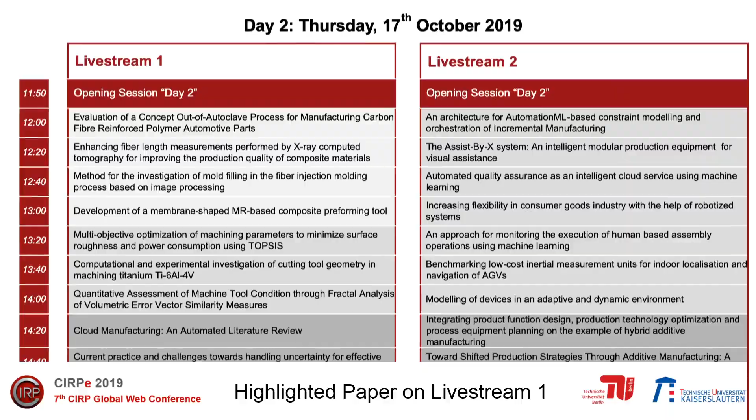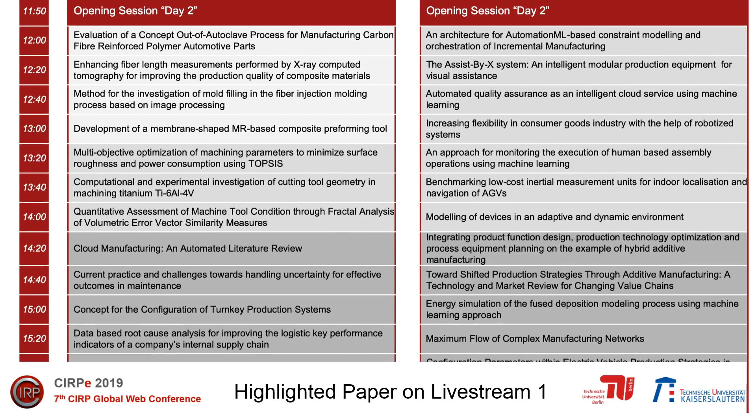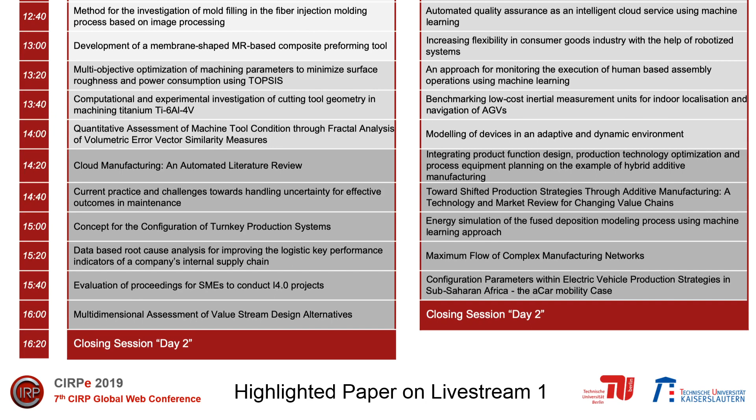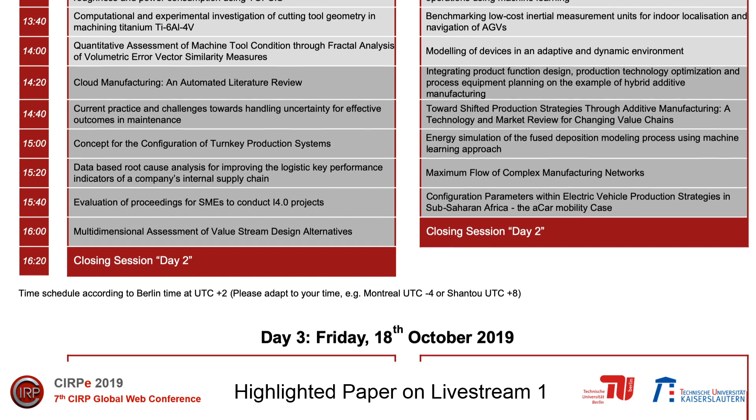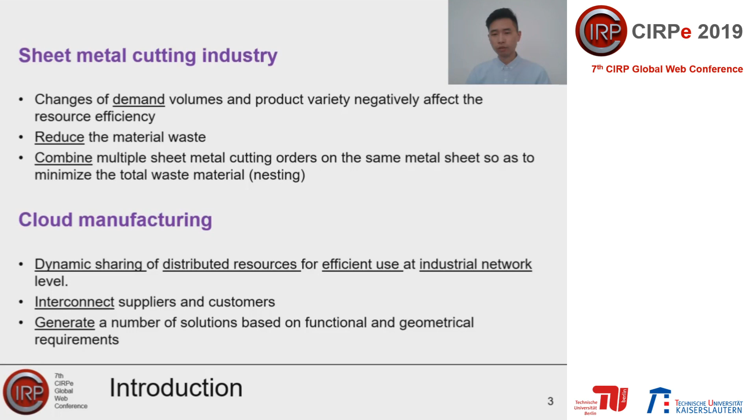An interesting tool in modern industrial context is cloud manufacturing, which can allow for the dynamic sharing of distributed resources in order to improve resource efficiency in smart industrial networks. Within the considered industrial sector, the interconnection of various types of users, such as suppliers and customers, can be carried out by generating a number of solutions at cloud level based on functional and geometrical requirements.

As the number of suppliers increases, the number of available solutions for customers increases too, resulting in a more complex decision-making process for the customers. In such a big and complex information environment, a solution recommendation system can play a crucial role in the decision-making process by taking into account customer past experience as their new choice. In this context, this paper proposes the conceptualization and development of an intelligent recommendation decision support tool.

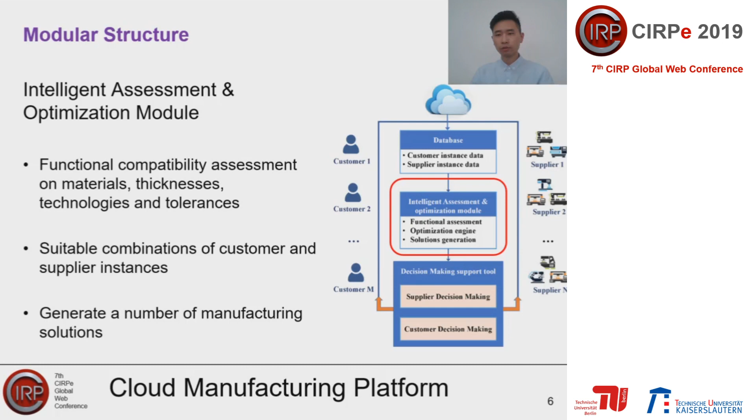This paper considers a modular-structured cloud manufacturing platform developed by the authors in previous works, which is summarized in this slide. First, users access the platform via a database module aimed at gathering customer and supplier instances, including information and details on their orders, such as quantity, material, geometrical features, deadlines, locations, and the code file. Such information is then processed by an intelligent assessment and optimization module, which first verifies the functional compatibilities based on materials, thicknesses, technologies, and tolerance. Subsequently, this module performs a user match, considering the compatible instances, and generates a number of manufacturing solutions, which are optimized for each pair of users.

The cloud platform is endowed with a twofold decision-making module for suppliers and customers, respectively. From a supplier perspective, the solutions are characterized by their surface utilization rate and deadline evaluations, whereas customers assess solutions according to a number of parameters ranging from surface utilization rate, energy consumption, processing time, distance cost, number of suppliers, and supplier rating.

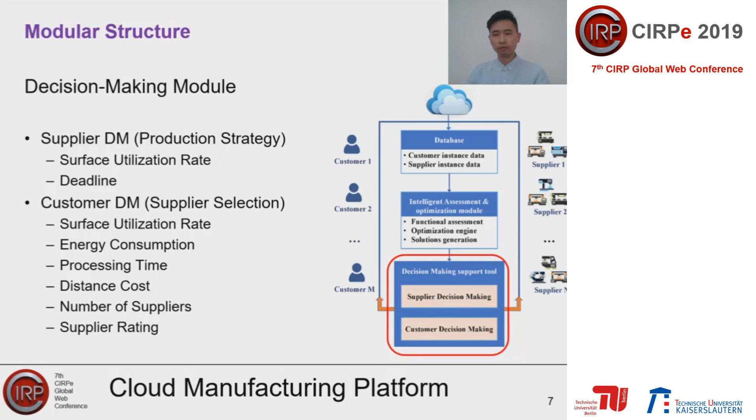This paper proposed a solution recommendation system that performed an intelligent solution ranking procedure. This is enabled by the use of a deep learning paradigm that allows capturing patterns among the customer's suppliers, solutions, and customer choice history.

The solution recommendation system is firstly trained using users' features as input data, namely quantity, available time to completion, area and perimeter of customer instance, and quantity, cutting speed, machine power, area and perimeter of supplier instance, along with the supplier rating.

Other inputs are solution features, consisting of surface utilization rate, processing time, energy consumption, and distance for a given solution. Additional features focus on material properties, such as material cost, thickness, and so on.

The ranking system is configured here as a multi-class pattern recognition problem. The system is trained using as target a number of solution tiers, representing the likelihood of a certain solution to be selected. This allows training the neural network to recognize patterns among the customer and supplier instance solutions and user selections.

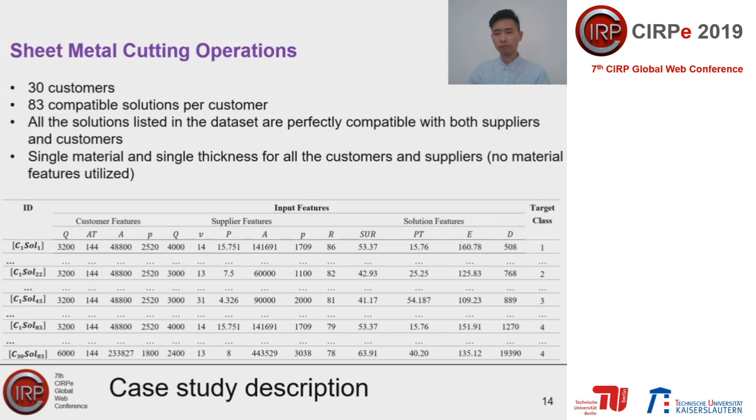For simplicity, all the solutions reported in the dataset have been demonstrated to be perfectly compatible for both users, and the material features have not been taken into account. This table shows, for each solution, the input features made of customer, supplier, and solution features, along with the target class represented by the tier.

For example, if a customer is in a hurry, which means less than 96 hours from the order placement to the deadline, such customer will likely choose a solution characterized by the minimum process time.

On the other hand, if a customer can rely on a supply which is geographically close or with low transportation costs, they will likely choose a solution with least distance cost. For customers demanding special geometrical requirements, the supply rating is surely the main driver for solution selection.

Considering the batch size, customers with large batch size will choose a solution with very high surface utilization rate, and customers with low batch size will choose a solution with minimum energy consumption.

Having built the input and training dataset, it is possible to build the neural network architecture. In this paper, it's outlined with 4 hidden layers, and each hidden layer has 28 nodes. For the hidden layer, we use hyperbolic tangent as the activation function, and for output, we use softmax. To train the system, we use gradient descent with a learning rate equal to 0.02.

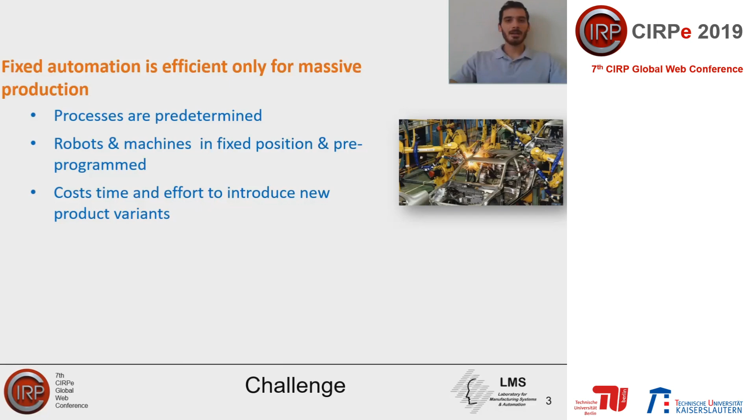The traditional production is mostly based on fixed automation and manual production. Fixed automation is very efficient for massive production, but it lacks flexibility, as the resources in the processes are fixed and pre-programmed. As a result, the introduction of new product variants is highly money and time consuming. On the other hand, manual production is highly flexible, but it creates ergonomic issues for the workers, as they are forced to handle heavy loads.

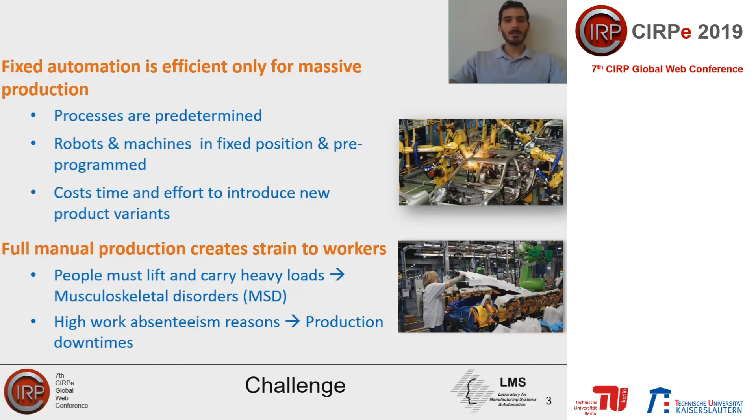The latest trend to overcome these challenges is to foster Human-Robot Collaboration, since it aspires to keep a low production cost and to increase factories' reconfigurability by combining the skills of both humans and robots. A reconfigurable factory could be enabled by a smart robot control system. Inspired by that, an efficient decision-making framework is developed that targets the dynamic work balancing among the human operators and robot resources, and the safe and efficient collaboration between them.

The proposed system is able to monitor in real time the production status and make decisions about the task allocation based on the current resources' availability and capabilities.

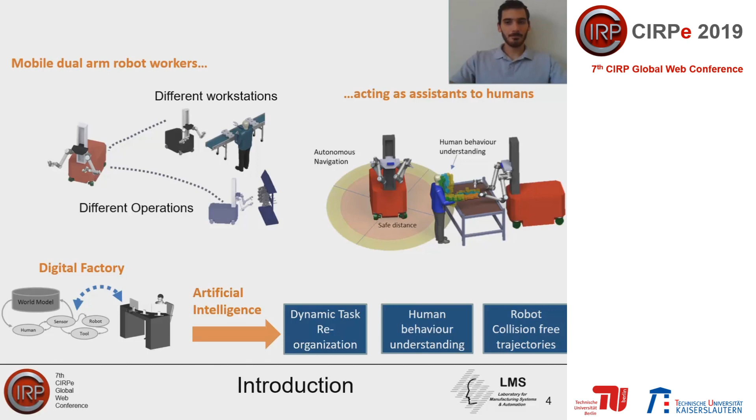In order to develop an effective control system, a multi-level decision-making approach is considered as the best strategy. As already mentioned, the ultimate goal is to dynamically and efficiently distribute the workload among the resources, taking into consideration real-time changes in the working environment.

To this end, the decisions made by the implemented framework are based on the two-way interaction between line-level and resource-level decision-making. This interaction takes place via a dynamically updated digital twin. The digital twin exchanges data in real time with sensors, MRP motion planners, search-based algorithms, and multi-criteria decision-making algorithms in order to generate the optimal scheduling.

The scheduling and the task allocation take place in layer 4, while the motion planning takes place in layer 5. Also, for the facilities representation, a 3-level breakdown of shop floor, assembly line, and assembly station has been implemented.

The decision-making framework developed to manipulate hybrid production systems is based on some clearly defined principles and follows strictly determined steps in order to achieve the most efficient task allocation among the resources. These steps are: resource suitability evaluation, generation of alternative scenarios, evaluation criteria ranking, evaluation of the generated alternatives based on the selected decision-making criteria, selection of the highest scoring alternative as the optimal scheduling solution, and motion planning. Each of these modules will be presented in the upcoming slides.

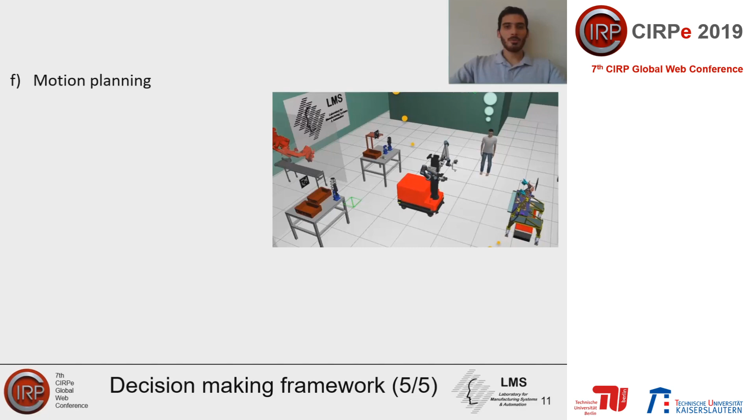As already mentioned, each alternative is simulated and evaluated via the digital twin. So in order to simulate the execution of each alternative and take the information needed for the evaluation process, like time estimations from the digital twin, the correspondent operations need to be translated into robot actions. This connection is proposed to be accomplished through a templated method. After experimenting, each individual type of operation has been linked to a group of robot actions, creating a unique template for each type of operation.

These templates are filled with information about the real world through the digital twin as well, and are used to simulate the robot's behavior during each alternative.

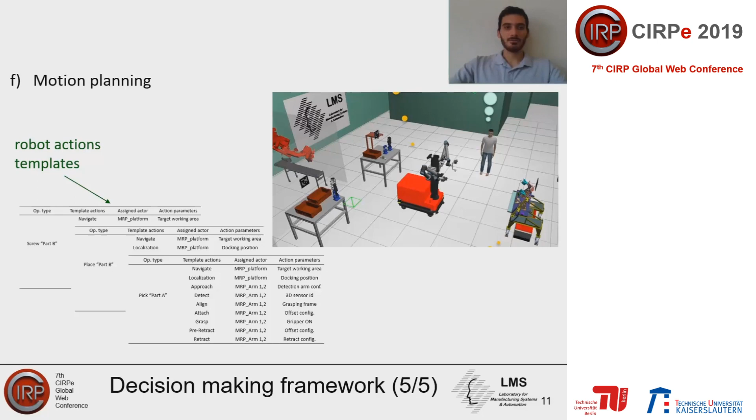The whole framework architecture is based on the interaction between three individual subsystems. These systems are the following: the digital twin database, in which is saved all the information and data about the process and the real world; and the planning tool and criteria evaluation functions, which are responsible for generating the alternative tree and evaluating each alternative based on the selected criteria.

The robot program generation module's role is to convert the operation-based schedule extracted by the task planner into a robot action-based executable program. All these modules are integrated in a central platform allowing their online communication and exchange of data and information in real time.

The proposed methodology has been applied to a collaborative scenario inspired by an actual production line of the automotive industry. In particular, the proposed framework has been implemented with the use of data from the front axle assembly line of a passenger vehicle.

In this case, the current production line employs 3 human operators in total. The main issues with this approach are ergonomic, as the human operators are forced to repeatedly carry and manipulate the 6 kg dampers.

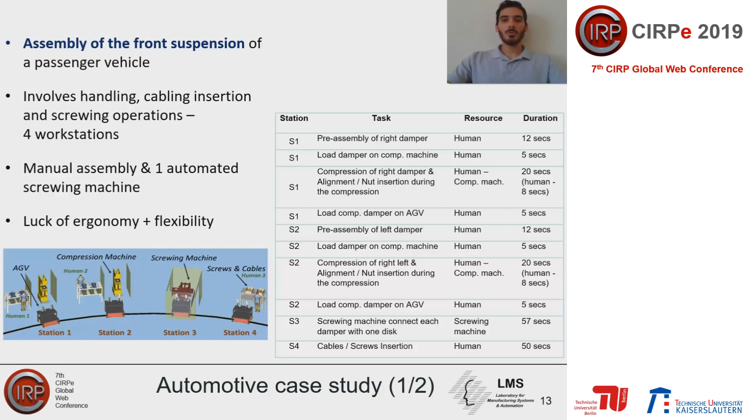This assembly line lacks flexibility, as the screwing machine is able to assemble only one car model, while the other 2 models produced from this line are assembled manually.

In the proposed production line, 2 MRPs will be introduced to take over some of the handling, inserting, and screwing operations. Thus, Station 4 will not be necessary anymore, as the operations taking place under this production phase will be transferred to Stations 1 and 2. Moreover, one of the MRP manipulators will undertake all the screwing operations, leading to the elimination of Station 3 as well.

Also, under this approach, all 3 car models are produced from the assembly line. Finally, after the introduction of the robotic manipulators, only one human operator will be needed to work in the remaining stations, allowing the exploitation of the other 2 workers in different posts where human capabilities are needed.

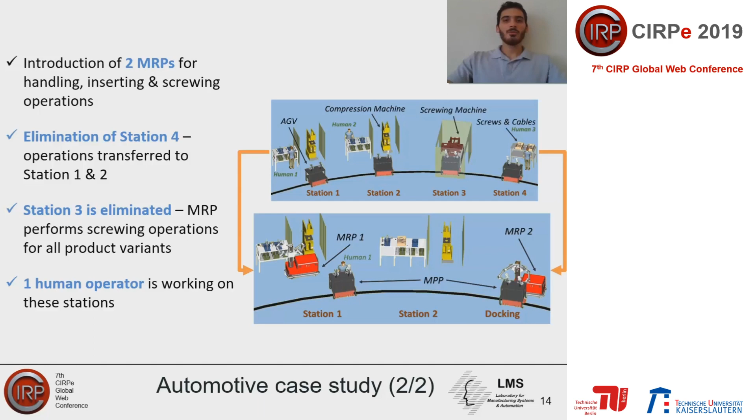Based on this case study, experiments and simulations were conducted in order to investigate the performance of the proposed system. Both systems were evaluated based on the same criteria metrics, and the arising results were used to compare their performances under the same conditions. Gantt charts and resource utilization diagrams are also presented for both manual and hybrid assembly models in order to compare the resources utilization.

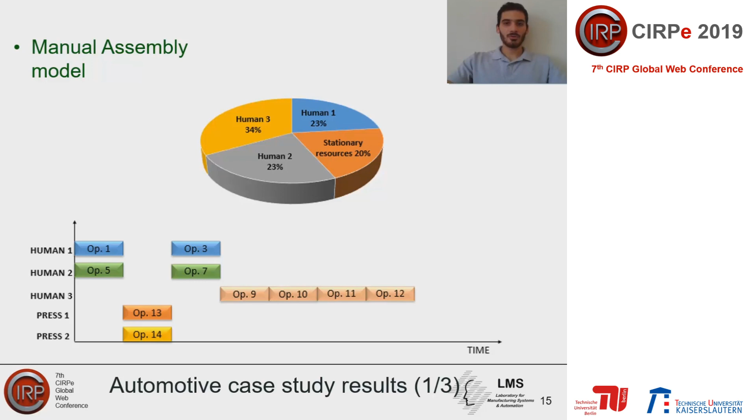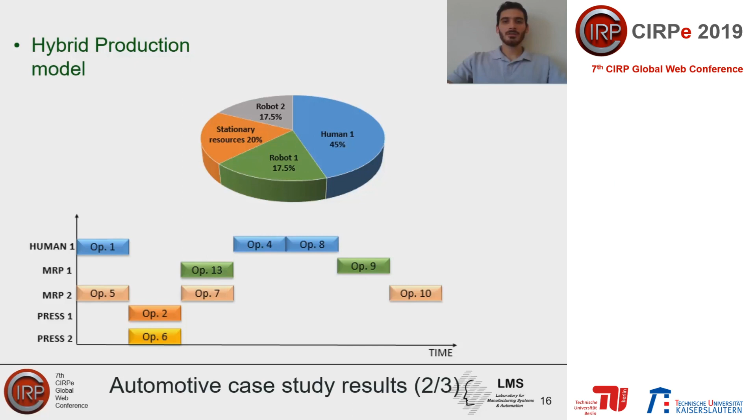By comparing the 2 models, it is evident that the hybrid production system presents higher performance validation metrics in every evaluation criterion used. The proposed approach achieved a significant reduction in flow time while reducing the payload handled by the human operators. As for the resources utilization, it is obvious based on the diagrams that under the hybrid production model...

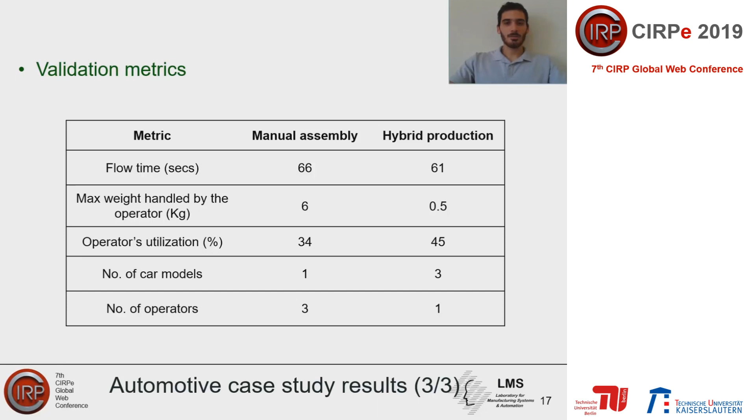A much more balanced task allocation among the resources is achieved, the idle time of each resource is significantly reduced, and the remaining human operators can be used in other more intellectually demanding tasks.

Summarizing, this case study discussed the implementation of a decision-making framework which combines efficiently scheduling and motion planning based on AI in robotic assembly lines. So, with the implementation of this architecture, many significant goals can be achieved, like optimal task allocation, easy rescheduling, optimal and realistic motion plans, and efficient exploitation of human capabilities.

As for the future work that needs to be done, the identified next step for enhancing the proposed method is the implementation of the developed framework in larger scale applications. Also, future studies should target how the integration with the factory's legacy system will be accomplished.

This work has been funded under EU H2020 project Mobile Dual-Arm Robotic Workers with Embedded Cognition for Hybrid and Dynamically Reconfigurable Manufacturing Systems, THOMAS.

Thank you very much for your attention.

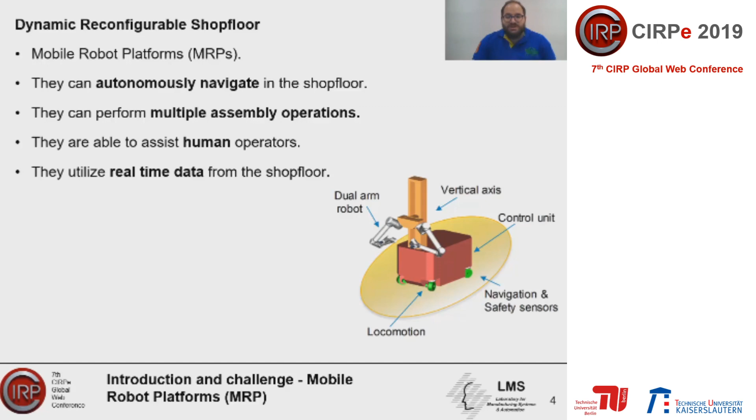To enable such autonomous flexible behavior, it is vital to efficiently organize all production entities and reason over the perceived environment using real-time data coming from the shop floor. The robotic systems should be able to receive information from multiple sources. They should also be able to identify objects, estimating the pose accurately, and be able to understand the 3D structure of their environment, so they can interact with it as well as with other resources for the completion of a task. The suggested execution control framework has two levels: the process level reconfiguration, which has 3 submodules, and the resource level adaptation.

The resource level adaptation has 2 submodules. For providing continuous input to the cognition modules of each level mechanism, a digital twin is required, which is updated in real time through the MRP sensors. The output of this is a visual representation of the shopfloor status and functionalities such as simplified control integration and sensor data sharing, a unified semantic data model, and real-time robot behavior adaptation.

The workload coordinator shown in this image is responsible for decoding the production plan into robot actions and sending these actions for execution.

The process reconfiguration level enables the adaptation at runtime of the process based on the shopfloor status. Dedicated interfaces with perception modules will allow the online reconfiguration of the execution. It is comprised of 3 modules. Firstly, the object detection, which accurately detects the position of a part, such as a damper, in order for the robot to be able to manipulate it. It can be used with different detection algorithms for the detection of different objects.

The global navigation refers to the motion of the whole mobile platform inside a known map of the shop floor. The map contains static obstacles that are defined through a mapping process, which takes place prior to the execution of production.

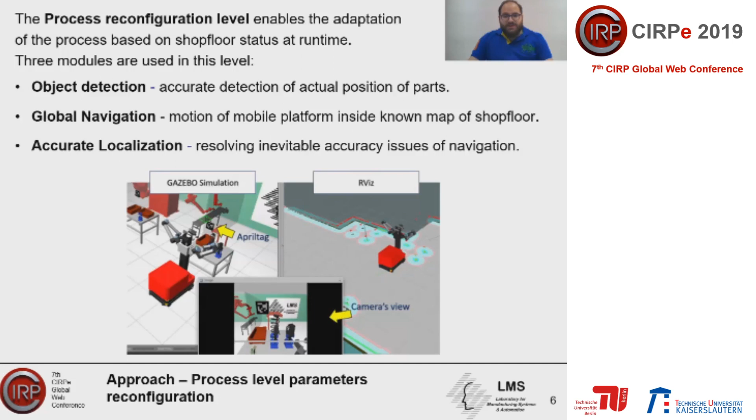The resource level adaptation is the lower level of the execution control framework, and it is responsible for the adaptation of navigation paths and arm motion trajectories. The main goal of this level is to avoid potential collisions with other resources and unmapped obstacles inside the environment. In order to do this, two modules are included.

First, the Arms and Torso Motion Planner, which exists to ensure safe and collision-free motion planning for the arms and torso of the MRP. It utilizes information from the digital twin concerning robot current state and kinematics, objects that are rigidly attached, and obstacles to avoid.

The Platform Path Planner is responsible for the online path planning of the platform, and its main responsibility is finding a minimum cost plan from start point to end point, considering the static and dynamic obstacles of the working environment.

Concerning the implementation of the software for the framework, it is based on the robot operating system principles and takes advantage of its interfaces such as topics, services and actions. All its modules are developed with a C++ programming language.

For the object detection module, several perception methods were tested, such as contours, which detect the object by detecting its outline, and the PPF and ICP algorithms, which are surface matching algorithms that find the spatial relation that aligns two 3D point sets. These methods are augmented by the use of fiducial markers.

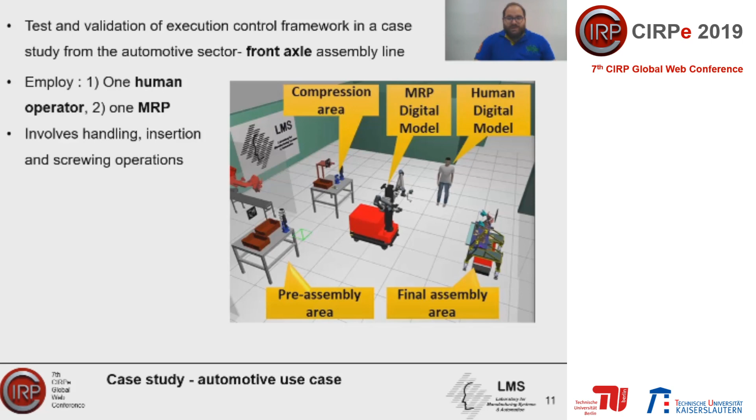Then it picks the compressed damper and must navigate to the final assembly area, where it will place the compressed damper and perform screwing operations.

The proposed framework enables both online process reconfiguration and MRP's action adaptation in case of any mechanism failure and/or unexpected human actions inside the robot's working area.

The sensors used for this implementation are the SICK Microscan, a Microsoft Kinect, an Intel RealSense, and two Roboception cameras, the rc_visard 65 and 160, all placed as shown in the image.

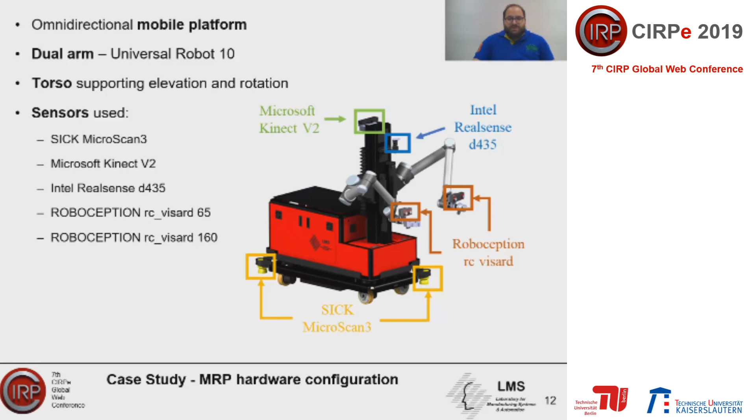The assembly process starts with the MRP's action for damper removal from the pre-assembly table. First, the damper needs to be detected with the use of the rc_visard 160 stereo camera sensor, which is mounted on the right arm of the MRP.

Based on the outcome of the detection, the motion of the robot arms for grasping the damper is calculated online. One marker is placed at a specific distance from the damper's fixture in order to perform accurate localization of the MRP in reference to the pre-assembly table and resolve large errors due to the navigation of the MRP.

After grasping the damper from its fixture, the MRP starts to navigate towards another workstation, the compression machine area. The mobile-based navigation process is based on real 2D data, which comes from laser scan sensors placed on the MRP's platform. The navigation map is constantly updated with the collision objects inside the robot's working area.

Both operators working around the mobile robot and static machines can be detected as collision objects. After this framework's implementation, the mobile robot's navigation plan is dynamically updated in case of an unexpected motion of a human operator close enough to the robot's body.

Virtual docking actions are executed to minimize the deviation between navigation goals and the robot's position after the navigation actions, based on the detection of AprilTag markers, which are placed on each workstation.

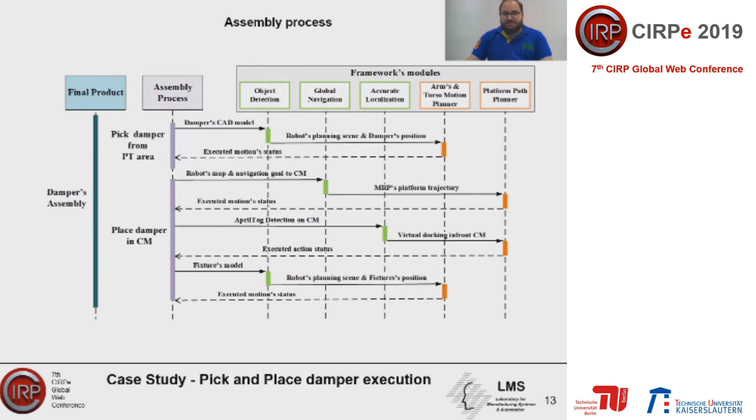Finally, as to the benefits of the proposed framework, it provides the interfaces for integrating mobile multi-arm robots with various cognition components. It minimizes the difficult teaching procedures and makes it possible that the layout of the workstation can be changed without hampering the robot's task execution.

As to future work, the aim is to integrate the execution control framework with a physical robot setup in order to validate its performance, and with high-level decision-making mechanisms, allowing task reallocation based on real-time production needs.

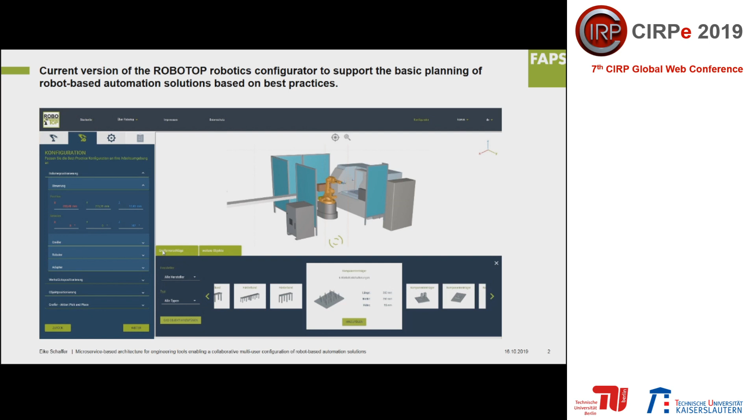The idea behind a multidisciplinary software architecture based on microservices is very simple. There are different providers who have highly specialized knowledge about their topic: simulation, configuration, export, visualization - and these highly specialized providers develop a microservice. And these microservices can be used in different software packages.

A platform operator combines these for a specialized use case, like in our case, robot-based automation solutions and their configuration, and builds with these services a highly specialized and customer-specific solution. The platform operator is the highest level in the platform ecosystem. He selects and combines the services. If a service is missing, he develops it.

Especially the developed services are high-level services, used to combine different subservices, some unique part of this platform. A general configurator, like a basic configurator, can combine different subconfigurators for robots, grippers, sensors and stuff like that. It uses the specialized knowledge of the low-level configurators and combines it with a general overview.

To get a better understanding of what differentiates microservices from other architectural patterns, we look at the separation of work. In a classical full monolith, the separation is that one person develops visualization, logic and data storage. So you have one team who has to accomplish every task.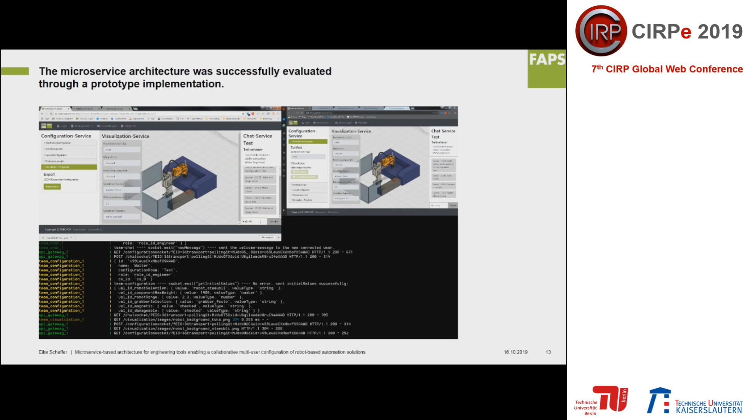Down here you see the running services and the underlying communication between the services, to get a little impression about the communication between the microservices. In a nutshell, it was shown how a microservice architecture based on micro frontends can be used to enhance development and maintainability of engineering software solutions.

Using the example of building a microservice-based multi-user configurator, it was shown that development can be carried out by individual teams, which can be grouped in compositions without visual representation, and microservices. The WebSocket fragments enable a multi-user session in real time, similar to the chat functionality, which was realized with the chat service. The configuration microservice distributes the current configuration parameters to all session participants.

The visualization service only displays and renders its 2D and 3D scene according to the current configuration parameters. This type of microservice architecture makes it possible to flexibly enhance individual fragments in views, add new ones, or deliver views with user-specific fragments depending on the role a user is logged in as.

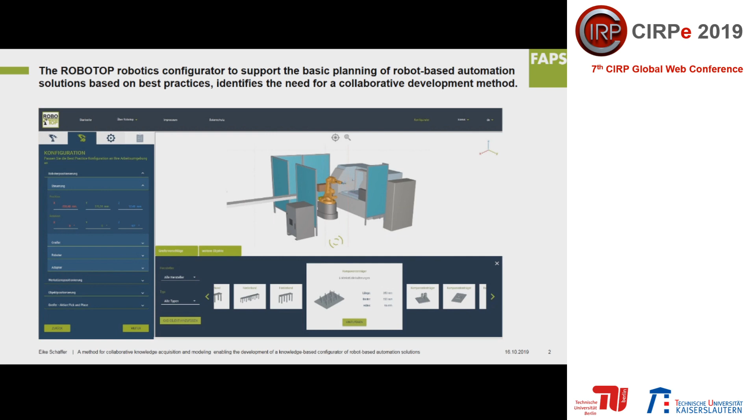By transferring interdisciplinary knowledge about the planning of robot-based automation solutions into an explicit configuration model, advantages of so-called knowledge-based systems can be realized. The term knowledge-based system is often used interchangeably with expert system, where the latter particularly refers to the capturing of a human expert's knowledge.

In contrast to the human expert, the expertise is available with constant performance, condensed, permanently, locally unbound, and immediately. This saves time and money and improves the quality and scalability when planning automation solutions.

However, in order to create such a configuration model, the expert knowledge must be found, extracted, pre-processed, standardized, and condensed. It is one, if not the most difficult task in creating a knowledge-based configurator.

In general, configuration is a special case of design activity where the artifact being configured is assembled from instances of a fixed set of well-defined component types, and components interact with each other in predefined ways.

Configuration tasks can be handled with three approaches: tabular, rule-based, and constraint-based. Tabular is a list of all valid combinations of components, so no configuration system is needed, but the maintenance effort is very high. As an example, with just 7 robots, 4 adapter plates, and 4 grippers, 112 variations are possible, but only 11 of these configurations are correct.

Existing alternatives to configurators are classical lists in Excel, where all alternative configurations are manually stored, hard-coded programming solutions which implicitly include the expert knowledge, existing enterprise software which is indirectly used for configuration, or the classical manual planning process without software support. Another approach is the rule-based approach, with production rules determining which components may be combined.

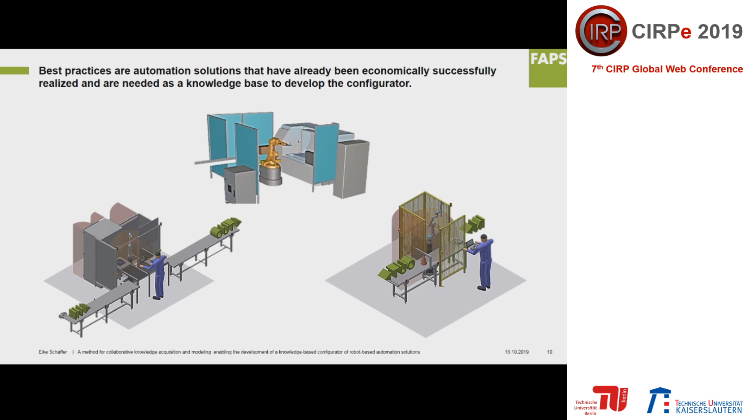To ensure the transferability and scalability of the knowledge base, it should be based on a generic model and a norm description language. Therefore, the so-called SPPR model is introduced as a generic semantic model for describing production systems.

As can be seen, the configuration model for robot-based automation cells includes scenario, product, and process as an input, and the technical implementation itself, resource, as an output.

This scenario contains general conditions and structural topological information for the automation cell. Serving as a starting base, it decreases the time required during configuration and limits the mathematical complexity for the solver.

The product represents the objects and their different processing stages. The properties of the product set the requirements for the resources which execute the processes.

The processes define the tasks for the resources and are used according to standards such as VDI 2860 for handling and DIN 8580 for the further operations.

In addition to the user requirements, i.e. scenario, product, and process, the configuration solution represented by a set of resources is also included in the semantic model. The solution has a placeholder structure consisting of generic resource modules that can be instantiated as required by the given task.

In the third step, abstract, generic topological elements are extracted from the best practices and information from expert interviews and literature. All the elements needed for modeling the automation solution should be found in a so-called 150% topology. The SPPR model is represented in the 150% topology.

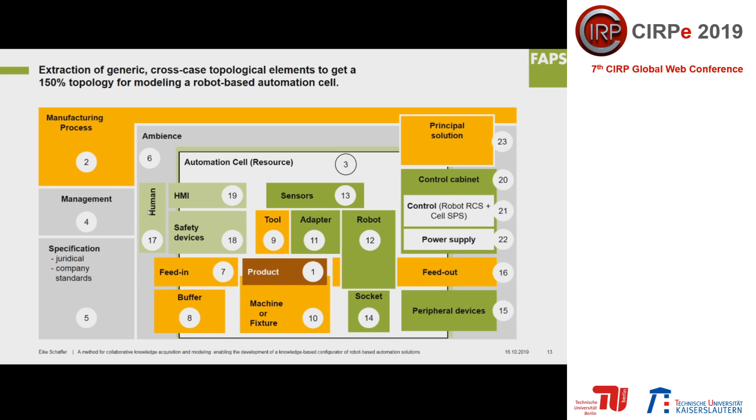The presented method focuses on the demand-oriented modeling approach, where the data schema is based on the needs of logical queries. In particular, steps 3 and 4 outline the primary challenge in the development of configurators, as these contain the condensed expert knowledge. In the presented case, dependency knowledge between the elements is derived in the form of constraints.

For this, a selection of use-case-relevant elements is extracted out of the 150% topology. In doing so, a two-dimensional assignment matrix is created holding all relevant topology elements on each axis. Each field of the matrix represents a binary relationship of the two affected elements.

The matrix arrangement enables the sequential collection of the constraints in a well-defined workflow. Due to the standardized structure, several people or small groups can work together in a workshop in parallel.

When assigning matrix elements, the knowledge engineer considers the knowledge and strengths of the persons available and involved, so the acquisition can be carried out based on division of labor, like an expert for robots. In addition, white knowledge spots become explicitly visible through the matrix arrangement.

This also enables the structured reuse of individual knowledge elements, respectively constraints, from one configuration project to another. Missing expertise can be obtained through literature screening, expert interviews, or outsourcing.

This way, the knowledge base can become extremely rich in content. Moreover, the detail level of the configuration can be easily adjusted by the number and depth of constraints of a field. By the structure completion of a field of the matrix, all possible relations between the topological elements are considered. Based on the extracted constraints, it becomes obvious which logical attributes the given elements require in order to be executed automatically within a configuration framework.

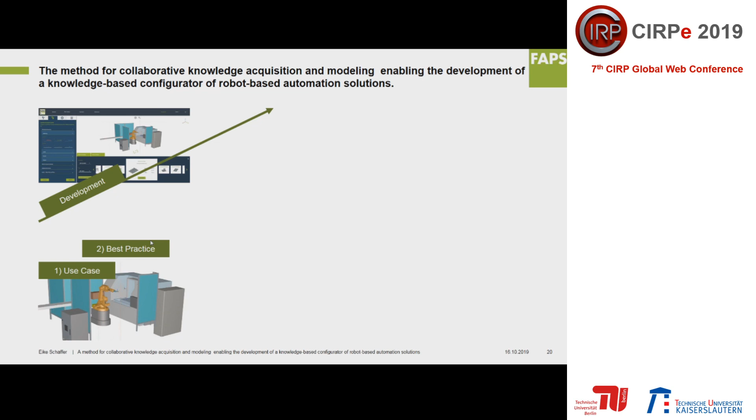The presented approach consists of 8 consecutive steps, enabling the creation of an interdisciplinary, more standardized configuration model and a division of labor. First, use cases and best practices are collected. Out of these, elements are extracted. Using these elements, constraints and attributes are formulated and integrated into a configuration framework. Out of these, they can be refined and reused for future projects. By using a support tool, this approach is supported in a more standardized way.

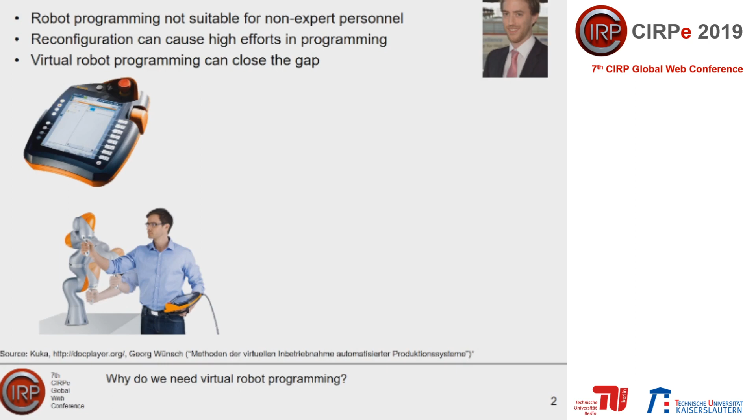Other approaches allow easy-to-use robot programming by guiding the robot manually. This is especially used when programming robots for human-robot collaboration. However, when having a flexible reconfigurable production system with a higher number of changes, this type of programming exceeds the range of efficient usability. Virtual robot programming can close the gap by anticipating certain activities. Depending on the maturity level of virtual commissioning, the total cost of commissioning can be reduced significantly.

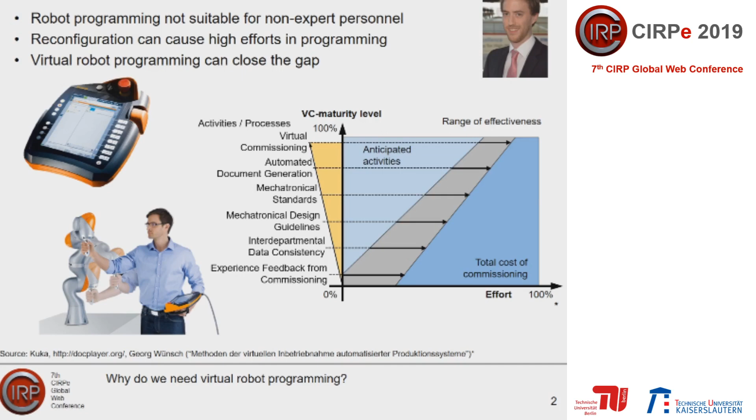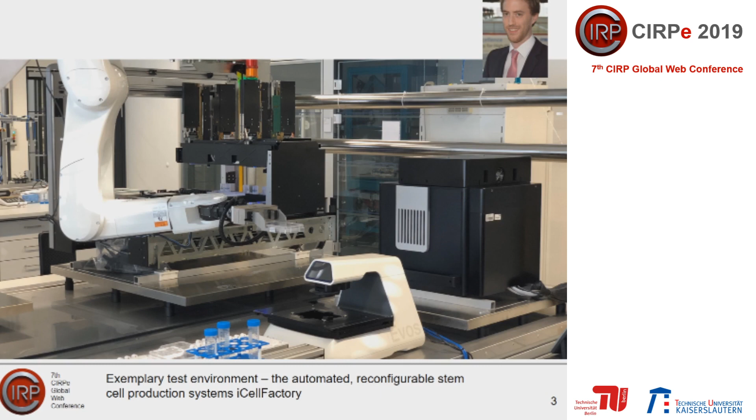Now let's take a look at an exemplary reconfigurable production system. In one of our research fields, we are focusing on lab automation. A central demonstrator is the iCell Factory, a reconfigurable automated production platform for stem cells. The system consists of a base system and 3 positionable modules for laboratory devices. In the following, the system is used as an exemplary use case to demonstrate the functionality of the framework.

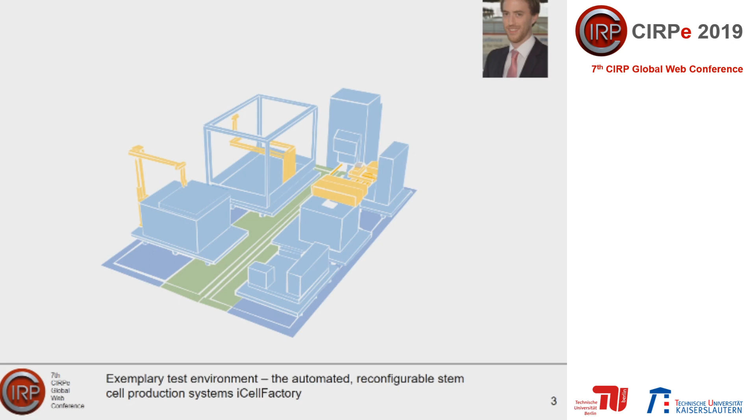What happens when the plant's physical configuration is changed? We need to update the virtual environment. Modules or components can either be removed, added, or modified. But how is it done?

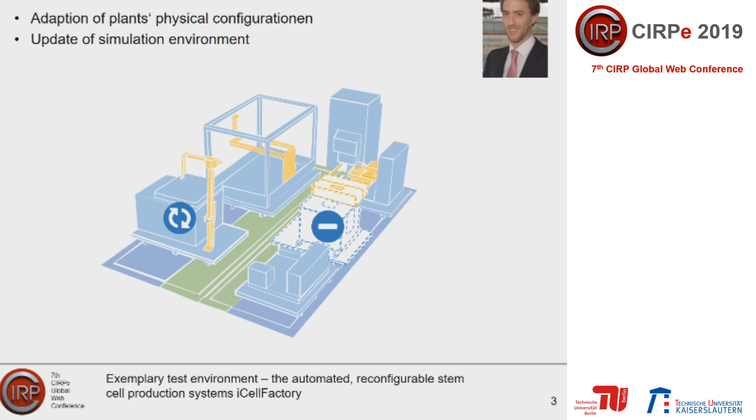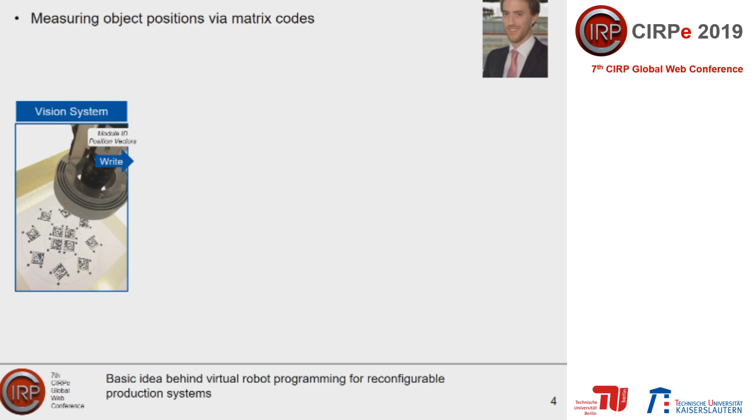Different sensors can be used to measure objects' positions in three-dimensional space, for example via vision systems. The measured position, orientation, and the object's ID are then written into an asset administration shell, instantiated for every module registered in the data management. The asset administration shell also contains a watchdog system, allowing the recognition of parameter changes.

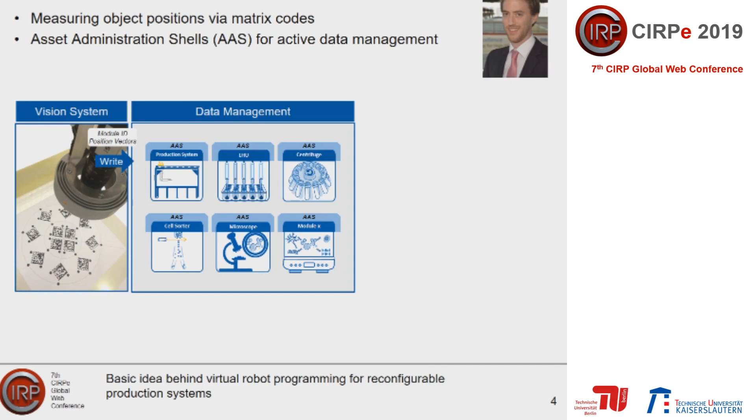In case of changes in position or orientation, the shells actively request a simulation service, providing all relevant data to it. After the robot path planning is done in the simulation, the paths are written into the respective asset administration shell again. There, the control system can access the information and execute certain robot operations.

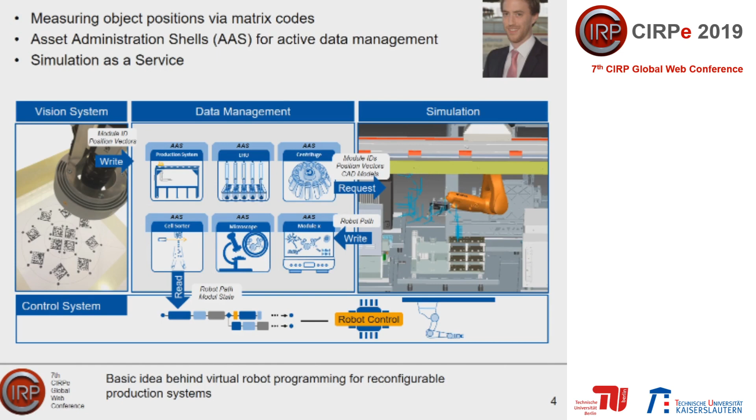The paper related to this presentation focuses on the simulation as a service approach. Our proposed simulation framework is based on a service-oriented architecture. To structure and modularize the simulation, it is split into main services and sub-services. While main services always host sub-services, the specific set of these sub-services can be changed at runtime. Thereby, the simulation can be adapted to the needed requirements.

For example, a sub-service to ensure safe transport of open liquid vessels can be included. To support this adaptable framework, a method is required to combine different sub-services. By defining a so-called pre-service description for the required data of a sub-service, and a post-service description returning the resulting output of a service, multiple services can be linked. The service description can be semantical and/or numerical.

For example, a sub-service for composing the virtual cell requires a kinematized CAD model. This requirement is defined in the service's pre-service description. Another subservice, preparation of models, returns these models as a result. This information is captured in its post-service description. The final information set is also given as the post-service description of the respective main service.

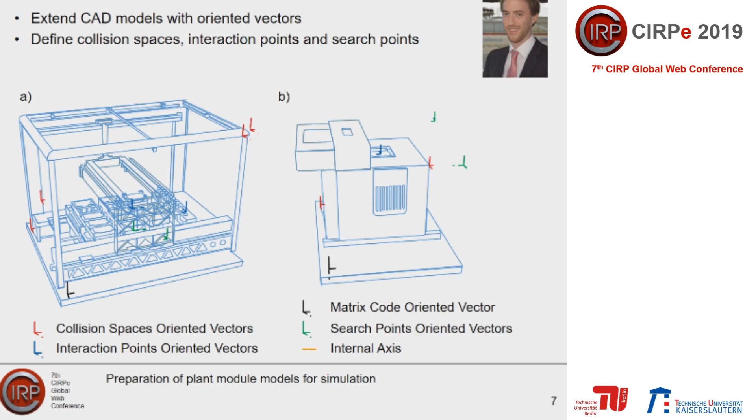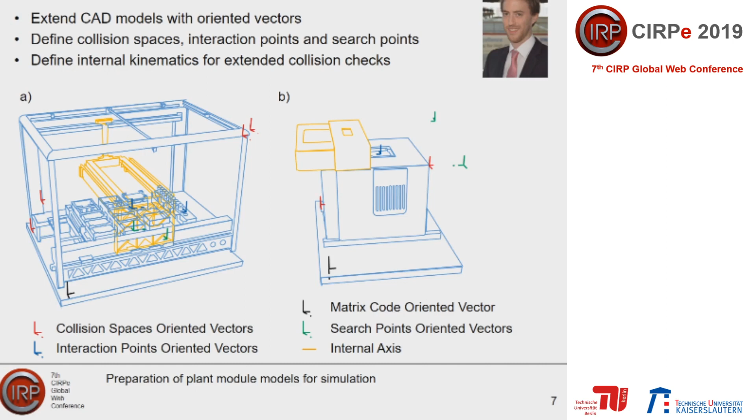Interaction points define deposit positions of modules for objects manipulated by the robot. To reduce the amount of possible robot paths and enhance the algorithm speed, search points can be defined. For modules with an internal kinematic, internal axis can be defined, allowing an extended collision check. Models prepared with the subservice are saved within their corresponding asset administration shell and can be requested from other subservices, for example when setting up the virtual environment.

For path planning, we propose a subservice divided into 4 process steps that are processed iteratively. First, the start, search, and end points are checked for validity. All points must be reachable without any collision in a static pose. In later iterations, all the intermediate points are checked.

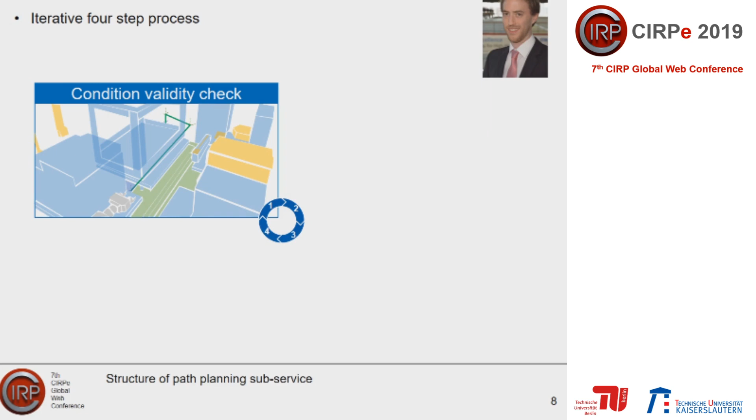In the second process step, a path planning algorithm based on rapidly exploring random tree searches for nearest neighbors using KD trees. Then the intermediate points are interpolated, and the movement is checked for collisions. In case of a collision in the movement or condition validity check, the interpolation's intermediate points can be reused for setting up the path.

The transport of open liquid-filled vessels via a handling robot is an important application in lab automation. To demonstrate the adaptability of the framework, two different but combinable subservices to avoid spilling liquid are used.

The first one utilizes the adaptation of the TCP's rotation. Spillage depends on multiple parameters, for example the acceleration. As the literature describes, liquid can be modeled as a pendulum. The acceleration is proportional to the displacement angle, and spilling liquid can be avoided by correcting the TCP's rotation angle depending on the acceleration profile of the TCP on track.

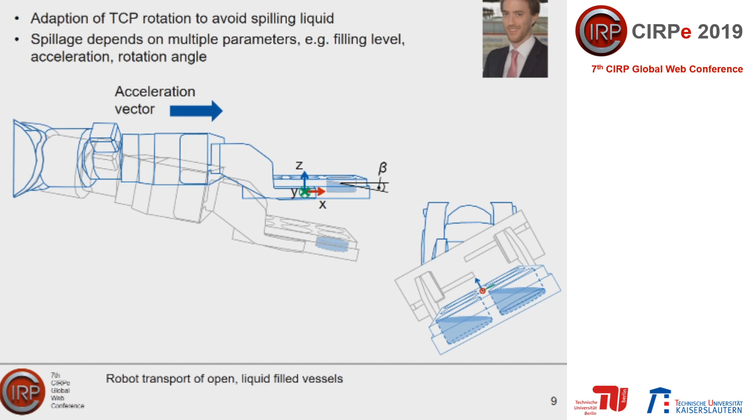The second subservice concentrates on the rotation angle of the TCP and its dependencies from the robot configuration. Thereby, the rotation of the TCP is not fully inhibited, but restricted to a limit of 10 degrees maximum.

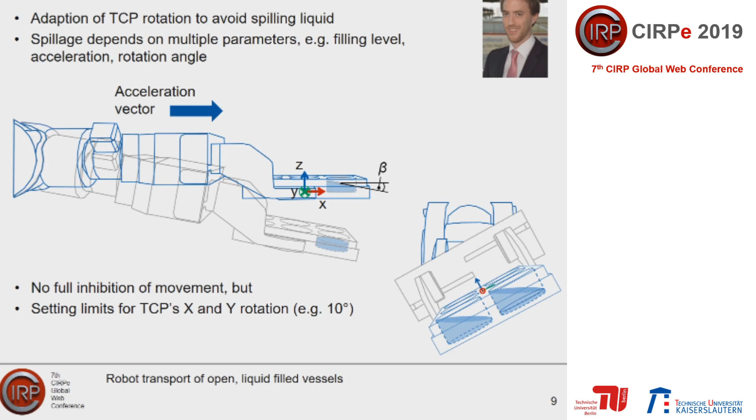The goal is to find the optimal configuration for each path and ensure a safe transition between different robot paths. Once the optimal robot configuration is found, the full path has to be checked for collisions in the movement again. A combination of the two subservices can achieve even better results in avoiding spillage, but also reduces the number of possible paths, as additional collisions have to be checked.

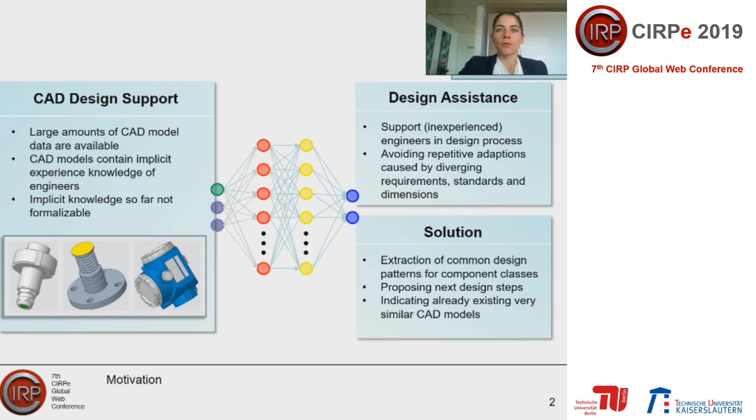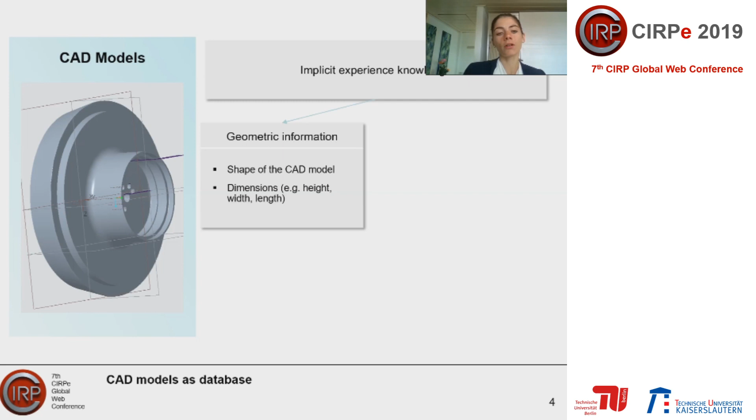So our database is mainly contained out of CAD models, which contain implicit experience knowledge of designers. On one hand, in form of pure geometric information, for example information about the shape of the CAD model or the different dimensions, just like height, width, and length. On the other hand, this is the so-called design history or model tree, which is the sequence of design features a designer used to build up this CAD model.

The model tree also contains the corresponding parameterization of those features. You can imagine a feature, for example, just like an extrusion of a cuboid, a drilling, or, for example, a rounding.

And what are we gonna do with this information? The geometric information we mainly use for a classification task or similarity analysis in our approach, and the design history we want to use to propose real next design steps to the designer in form of next features.

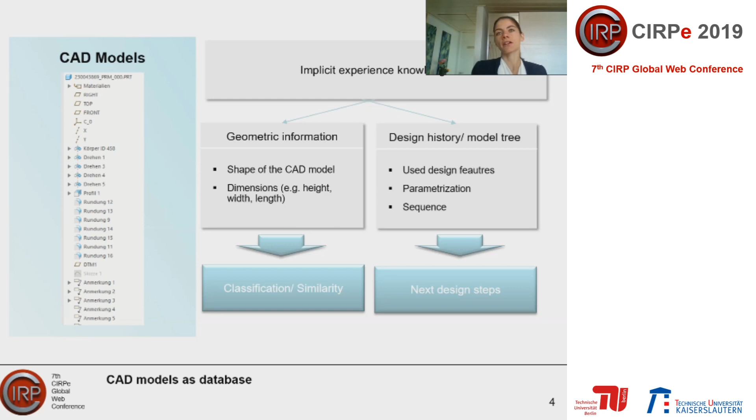So how does our approach look like? We have a three-stage approach, and the basis for our approach is first to make some component classification in order to categorize the existing database, and so enable a designer to find a suitable CAD model more quickly. Therefore, we first make some classification, and then we try to propose, within one component class, the most similar CAD model that already exists. So this is the basis.

The next step is then to classify semi-finished components during a design process. This means our design assistant shall recognize, while a designer is designing the product, which component class is currently under design. Then, if it has recognized which component class it is, it shall look in the existing database of this component class if there already exists some very similar CAD model, which is then proposed to the designer in order to avoid the designing of duplicates and to save time.

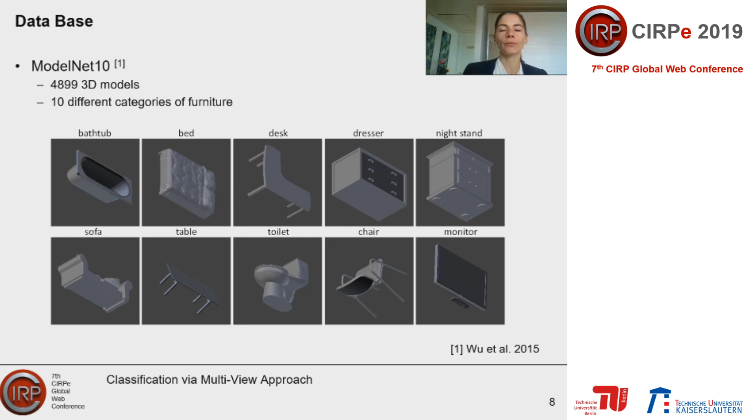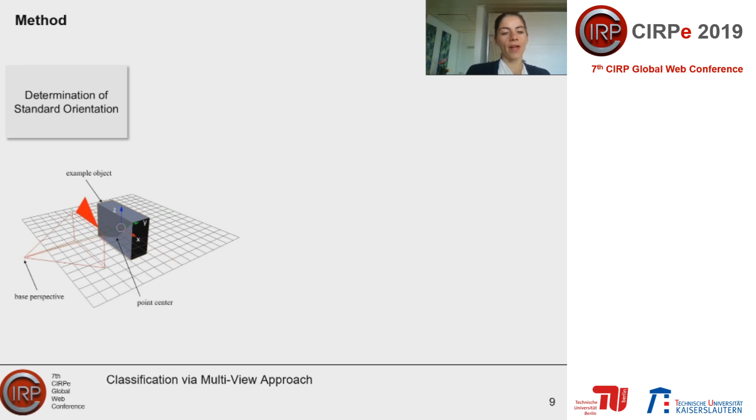First of all, we determined some kind of standard orientation with respect to a defined base perspective, as you can see here in the picture.

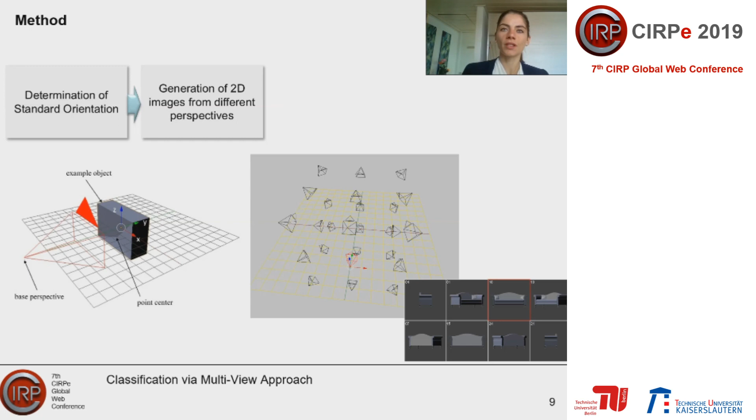The next step is to train the perspective-specific CNNs with those 2D images we get in the way I just explained. The classification is then done by pooling over all perspective-specific class probabilities.

We summed up all probabilities from the perspective-specific CNNs. In sum, these were 26 different probabilities for the 26 different images. Then we calculated the average over these probabilities, and this is our final class assignment.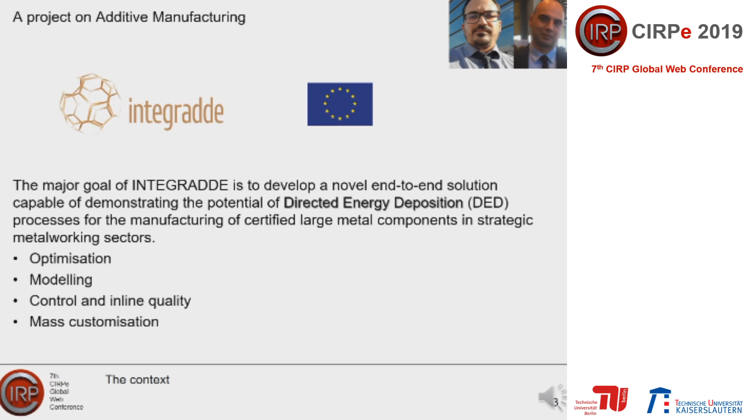This, of course, needs to be done through modeling and under the prism of mass customization. So, as being apparent, the concept of digital twin will be extremely useful in our case.

As aforementioned, there is need for enhancement of manufacturing processes in terms of optimization and control. What is, however, required in any case is having a corresponding model that will allow describing the behavior of the system and at the same time be able to test and or design the controller in real time.

Data-driven models seem to be able to be utilized as a digital twin as long as formulating the system as a dynamic system is feasible. In the meantime, the distant goal is to control the process efficiently with respect to main manufacturing criteria. So there has to be some sort of matching between control theory concepts and manufacturing process performance indicators, such as temperature tracking error and quality, temperature tracking rise time, and H2 norm of the input signal as energy.

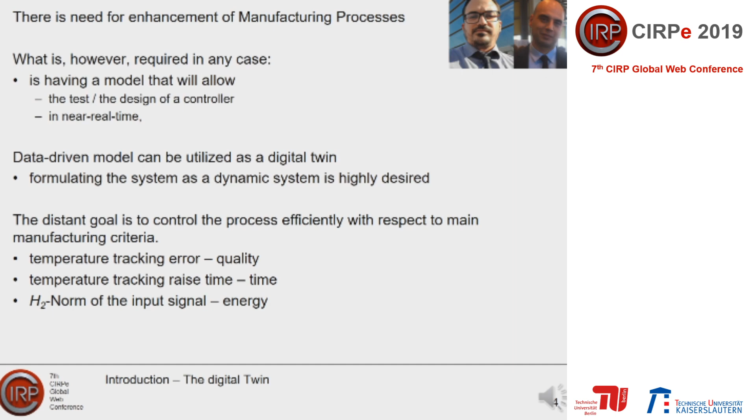A framework for optimizing or controlling a manufacturing process is going to be introduced through its characteristics. The framework under which the current work is developed has to do with retrieving a digital twin through utilizing a dynamic system as a real-time model.

This model has to be adaptive towards the real laser manufacturing process through monitoring, and at the same time it has to be used in order to design a controller no matter how complex the process is.

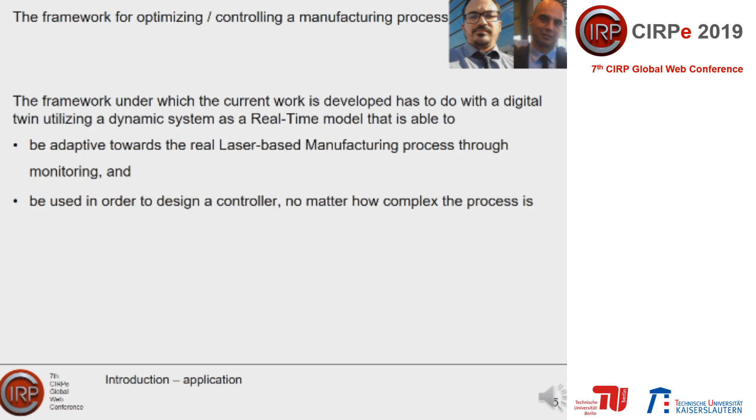The characteristics of the strategy are that, first, the human is kept in the loop while there are automation attempts. Additionally, it would be good for the model to be self-evaluating.

The strategy itself is that we are going to use a dynamic system that will represent the process itself, a laser-based process in our case, and at the same time it will be used to control the process. The digital twin will thus be able to operate the process automatically, provide intuition to the user/operator, and be able to give responses to what-if scenarios.

These are all apparent in the loop of the diagram. Schematically, the digital twin and the dynamic system are given separately for the sake of generality.

The models by themselves, however, are not going to be simple. Nodal temperatures are affecting each other through various phenomena such as conduction. Even in the case of a linear discretized system, their mathematical relation will be complex, involving the existence of many transfer functions. Our goal is to manipulate this complexity.

It seems that we can handle this situation through specific models requiring more than one dynamic system. Two or more sets of dynamics are considered as coexisting and interchangeable. The changed dynamics can be deterministic or stochastic and can be up to the input, the output, or even a state variable. There may be also need for smooth change, which makes models slightly more difficult to handle.

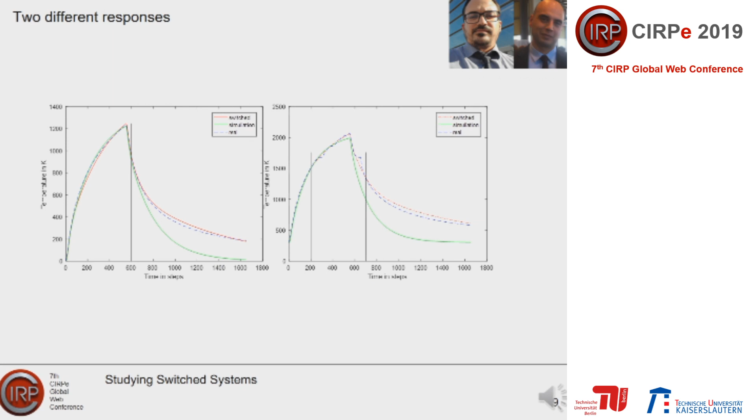There are this way also possibilities for process control through applying control theory. It is mentioned here that when controlling a system, there are two candidate positions of the controller: one for tracking, on the feed-forward branch, and one for stabilization, on the feedback.

In the diagram on the right, you can see that a single controller can be used to enhance the system regarding tracking. Input may have to be regarded as temperature here. Retrieving power signal may get tricky though.

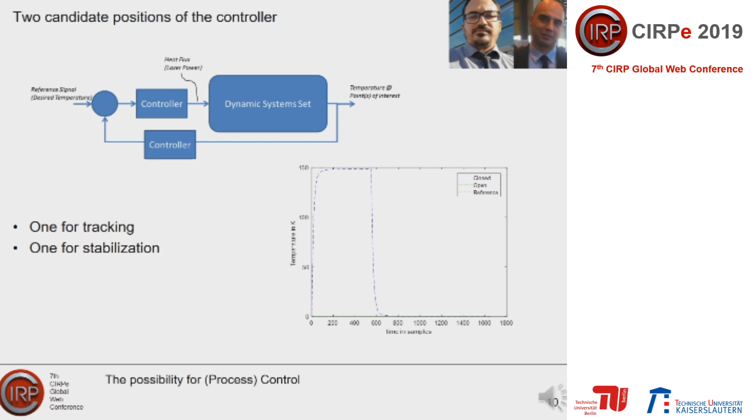However, not all things are simple here. We will proceed the illustration with designing a bang-bang controller, meaning an optimal controller averaging tracking with energy efficiency.

There are constraints in the laser power itself. For example, the input signal can take only two values. For this case, the modeling has slightly changed.

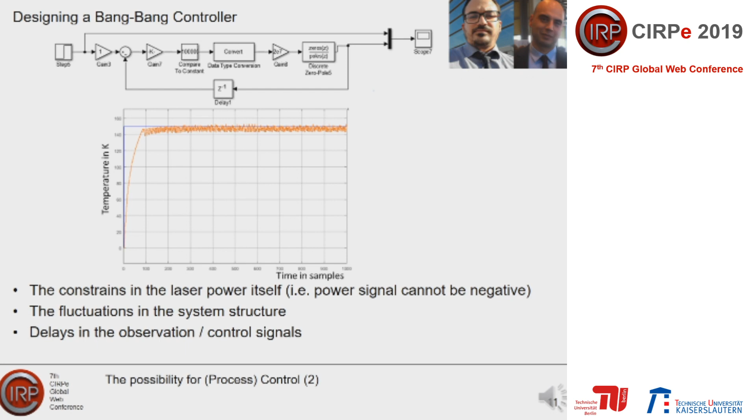You can see the fluctuations in the system output, which means that the controller indeed changes states, while a delay has been added in the observation and control signals for the system to be solvable. All this concludes to the fact that the closed-loop system performance has to be checked, since we have gone a bit away from the theory.

This is even evident through studying the behavior with root loci. It can be easily spotted that depending on the phase of the system we're interested in, namely heating up, cooling down, etc., first, the behavior changes in terms of time constants, overshoots, etc., and secondly, the controller appears to affect differently each phase.

This may affect even the stability of the closed-loop system, which is unwanted. As a result, a controller has to be switched or robust enough to handle every situation encountered, regardless of the uncertainties deriving from the material or the process.

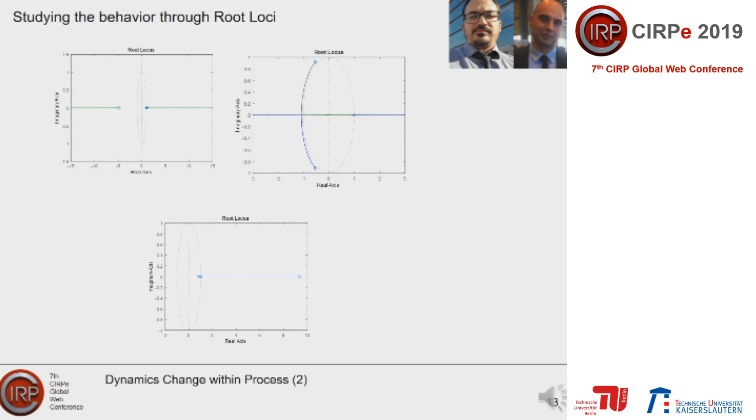Since we are in the direction of creating a digital twin that can be used to optimize the manufacturing process, some meta functions would be extremely useful. So, towards automated decision making, from computer science we can adopt Amdahl's law.

So, in a system of subsystems, if we accelerate a subsystem of size p by s, then the whole system is going to be accelerated by s latency. In our case, we can divide the process down to heating, melting down, and cooling down.

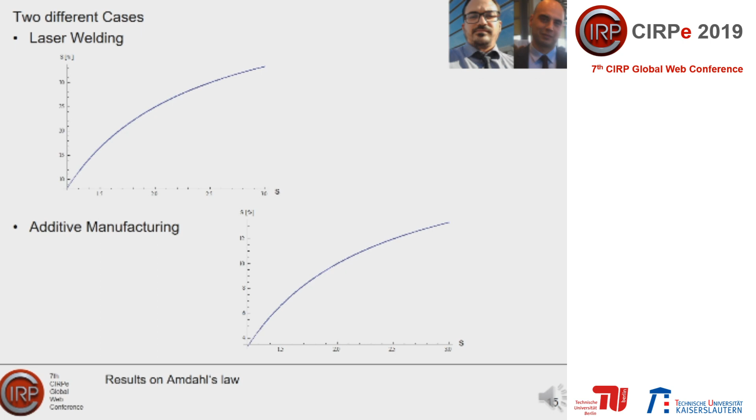So, we have come to a point where some conclusions can be given. Under the prism of creating a process-level digital twin, laser-based manufacturing process modeling is reconsidered, and the combination of dynamic models through switched change in dynamics has been used.

The controller itself, even if it is considered to be a static gain, can be quite hard to obtain through an analytical procedure, as the dynamics are quite challenging. Understanding the dynamics of each phase, meaning heating up, melting, and cooling down, seems to be of high importance towards being able to control the process itself.

This is highly evident by the change of position of the identified zeros and poles on the complex plane. Finally, depending on the process itself, the margins for improvement are case dependent, and complexity of the controller design may even delay the introduction to the market.

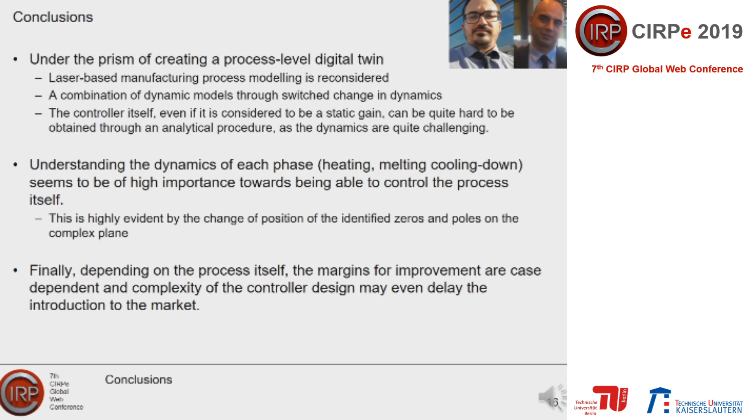Regarding future work, in order to integrate such methodologies to a greater extent to digital twins, further matching is required between physics, such as melting, front propagation, convection and conduction, and behavior of the dynamic system in terms of relaxation times, overshoots, etc. This will further enhance both monitoring in terms of placement of the sensors and control, for example, adding extra criteria or other conditions.

Evaluating the need for a controller through the digital twin, or empirically verifying metrics related to control applicability, is highly suggested. Examining such controllers in a near industrial environment, as well as studying the behavior of such closed-loop systems utilizing dynamic controllers, is suggested. Considering efficiency in terms of controller design time and system ramp-up should be considered as an additional metric, and studying the repeatability of such controllers for different kinds of lasers and different kinds of materials is also suggested.